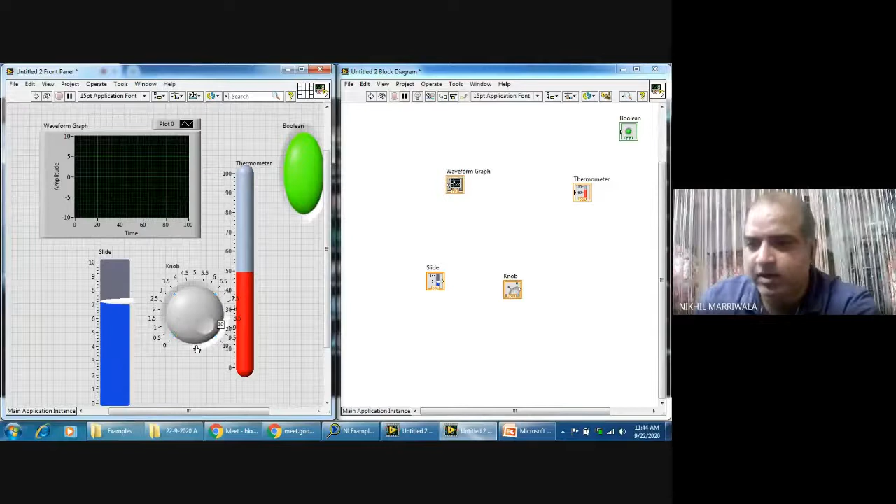So you can place numerous things. Again, I need not specify another. I can specify a knob over here. If I extend it, you can move it like you move a knob in your hardware structures. So you can move them, just holding it and moving it. These are some of the graphical things that are placed or used in LabVIEW, and this is how the front panel would behave.

So this is how I just showed you. The block diagram, or backend programming, would look like this. The front panel objects would appear as we normally saw, that whatever we are placing in the front panel, the same is appearing in the block diagram configuration. Also, we can connect them.

Once we connect them, the icon and the connector pane comes into picture. So what we'll do is we'll start with these things. I'll show you some more aspects of LabVIEW which are very useful for us, so that you become familiar with the environment, and then we will be able to design a particular system for us.

The front panel would talk about all the controls, indicators, object styles, object types, that is Boolean, numeric, and string. So this is the front panel, how it looks like.

Now, if you see over here, I just expanded or zoomed in. We have this run, and this continuous run over here. I can use this pen to highlight things. This is basically a run icon, so if you want to run your program, you can use this. Click onto this - this is continuous run. Continuous run is utilized. This is for stop, this is for pause. And then we have some font applications in this case, and there are some more features.

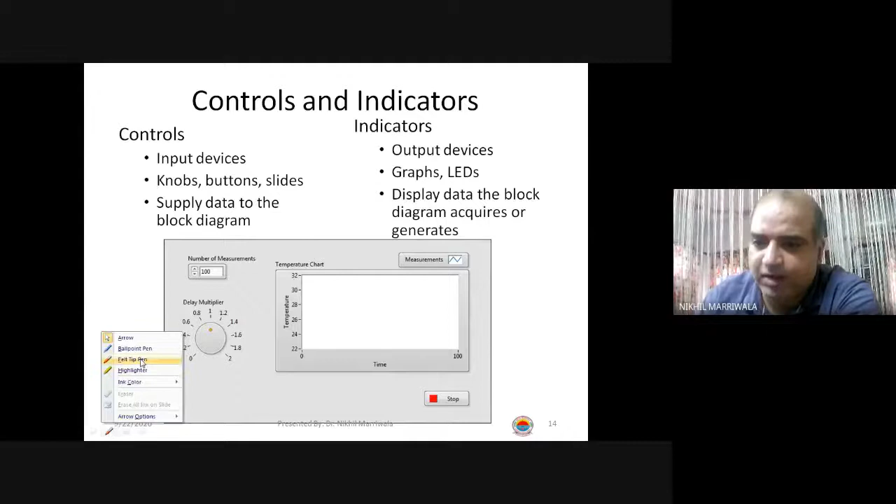So controls and indicators - I've already specified that we have different types of inputs, knobs, buttons available in the LabVIEW part, and we will be using them to actually control the operation. So front panel style objects look like this.

So we have different types of style objects. We have modern controls, we have system controls, we also have a silver control available with us. And initially when LabVIEW got started, we had some classical controls. So this is still there, right, they're still using it. The only part is the representation is a little bit different, but other than that, all the functions are the same, so we need not get confused by it.

Then we have some numeric controls and indicators I've just shown you. Control means basically the input and then the output.

So what we'll do is I'll go back to this particular software, and what I'll do is I'll show you a very simple system of how you can work with this.

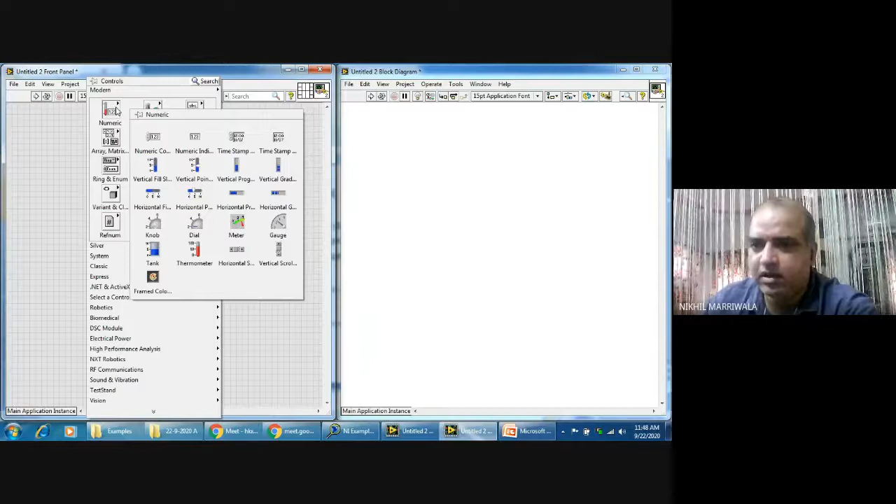So, say what we want is we want a simple structure where I use a vertical pointer and I use a thermometer for that sake. I've placed the two over here. I hope you can see this. And what I do is I change the value to 100 - I just clicked onto this and changed the value, nothing else. So now you can see the two things, slider and a thermometer.

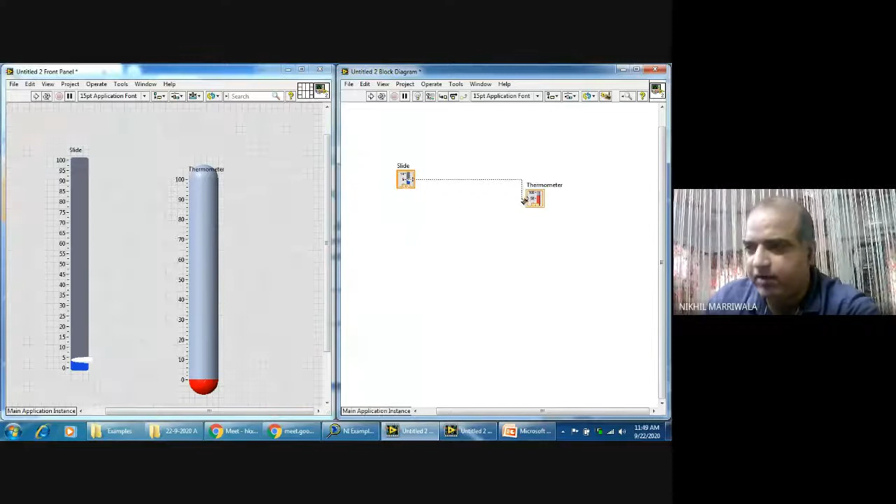A simple program to be written where I will control the output of the thermometer with the help of a slider. So I've just connected the wire. Connections will always be done in the block diagram configuration - all the connections will be there in the block diagram. So now you run this.

Now when you run this you'll see - or what I'll do is I'll run continuously - you'll see the change happening. So this is a simple program that we have written where we are controlling the thermometer with the slider. Whatever value it is showing here, the thermometer is representing the same value. I could have done it with a knob also.

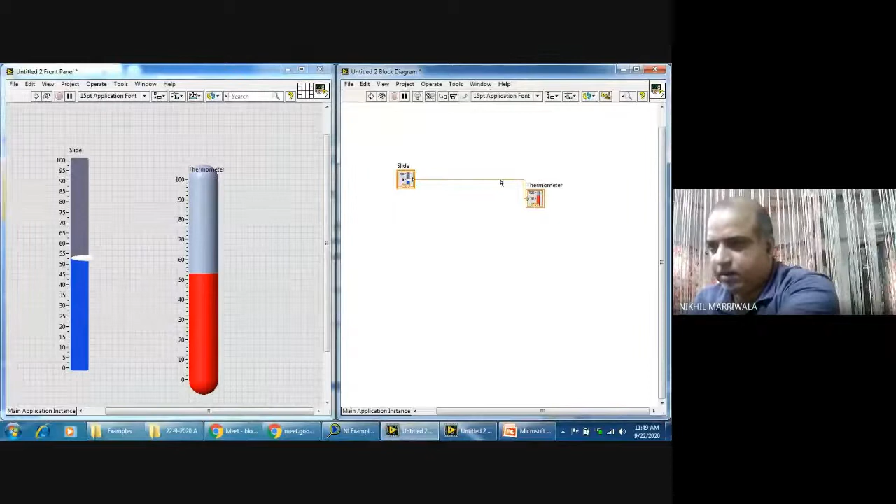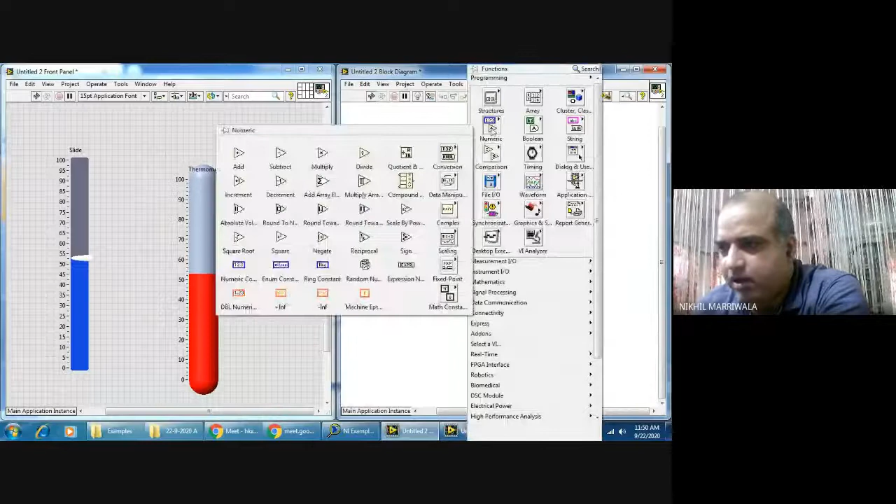Now what I'll do is similarly you can use some numeric controls also. Say, again what I'm doing is I'm right clicking - numeric control, multiply, and I use a divide. So I place three things: add, multiply, and divide. I hope everybody can see this.

Now what I'm doing is I'm just giving the input of the slider to this adder. So if you see, the output of this particular thing is - when I move my cursor here you can see x plus y. Can you see this? X plus y being represented automatically, I haven't done anything. So I've given the output to the multiplier, and this multiplier output given to the thermometer.

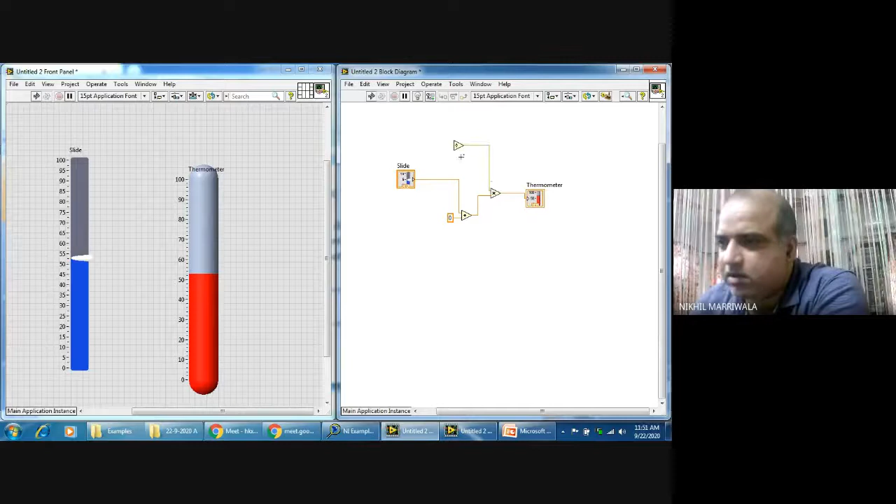Now I right click onto the other input, create a control - or say rather than control, I'll use a constant. I'll remove this so that it becomes easier for us to understand. I'll use a constant over here. The output of this divider is given to this multiplier again, and I create a constant over here. I create another constant over here, so I can give some values inside it, say 5, 9, and 32.

So what I'm doing is I've basically utilized the mathematical functions of converting from degree centigrade to Fahrenheit. Because I was using a thermometer, I just happened to use this particular example. So again, I use run continuously over here. Now you can see 0, but the output is something else because the mathematical computation is happening. I'll just move it slightly for your benefit to see where it goes. Right now it has become almost constant, and it is not increasing to that extent because it is being controlled - do you understand this? Now we have introduced a mathematical program inside the structure.

Another important thing that I told you was that we will be using this particular block called highlight execution. Have a look over this block - you'll see some data bytes moving, and you'll see some values being represented.

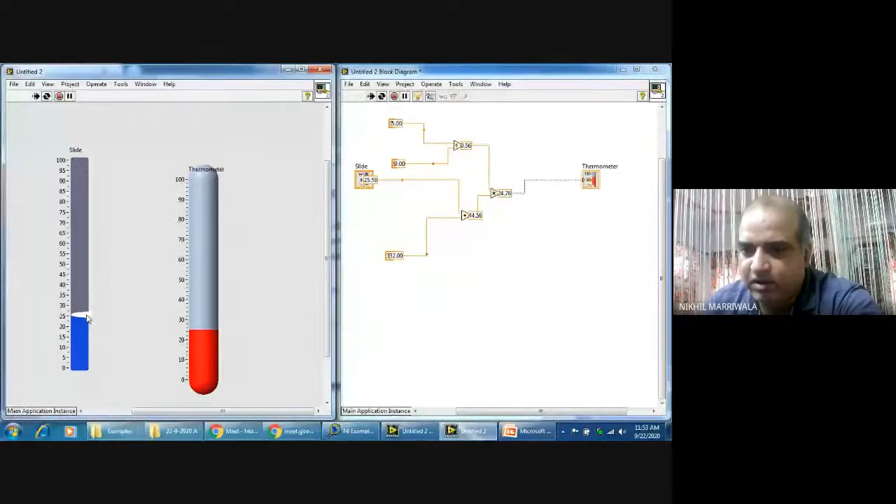You can see where the problem may be and what the output value is. Now if I change the input value, does it change? Yes, it will definitely change once the execution happens. Now it has changed, you can see that, right? I'm changing some value again because it's not that drastic, so it will take some time. It's happening slowly because data movement is being shown.

There is another important feature: we can use a probe. When I move my cursor onto this line, a P comes up. I hope everybody can see this. When I click onto this, you can see the value. I can add another value to this, node executed, then another value to this. So you can see 1, 2, 3 being represented. 1 is slider, 2 is X, 3 is Y. So everything can be monitored easily.

In all cases where you are working in laboratories, this is a very interesting and important feature, where you can record and save your data also. So whatever experiment you have done, you can visualize the experiment first, and then you can record the data also.

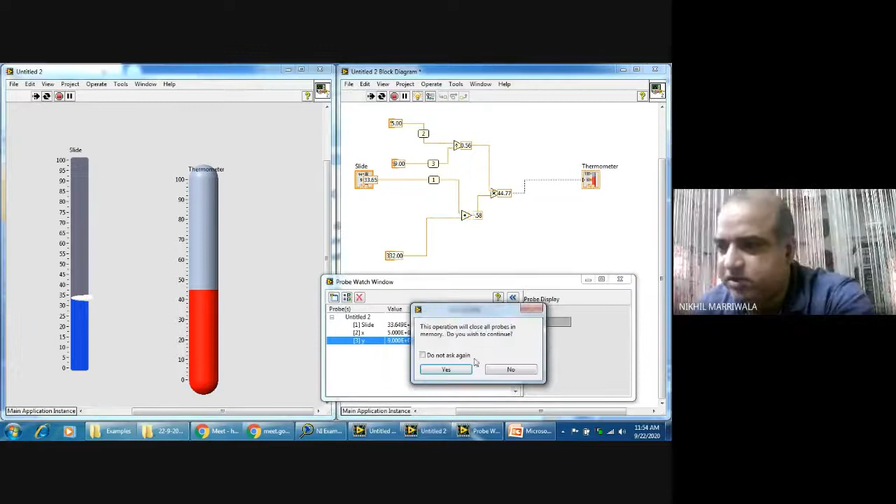So these are some of the features I wanted to show you before we start working with this particular software. So right now I'll move back to the slides.

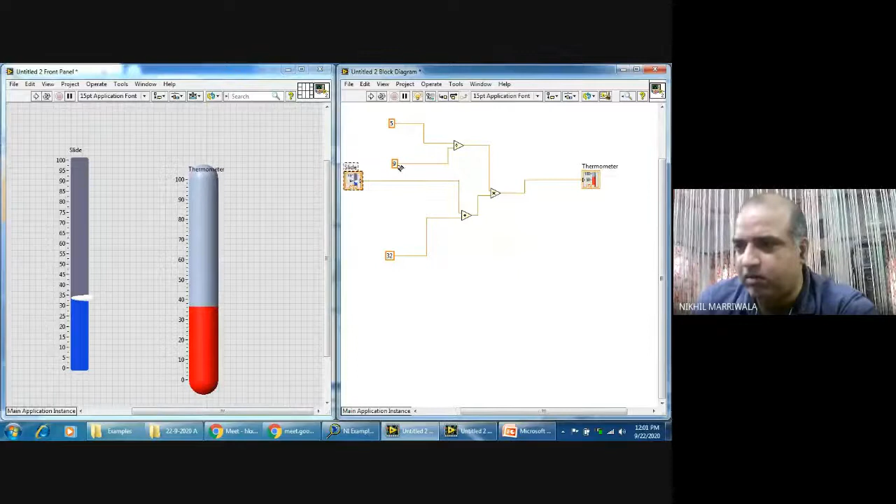I think I can remove this now, so I'll go back to the previous part. We've just programmed this. Now I'll reduce the size so I'm able to show you the next aspect of this particular structure. I'll be using the same example so you are also able to follow this. A simple program for area of a triangle can definitely be given - this might be given as a problem by sir also, so that once you are using it, you are able to utilize the features of this particular software.

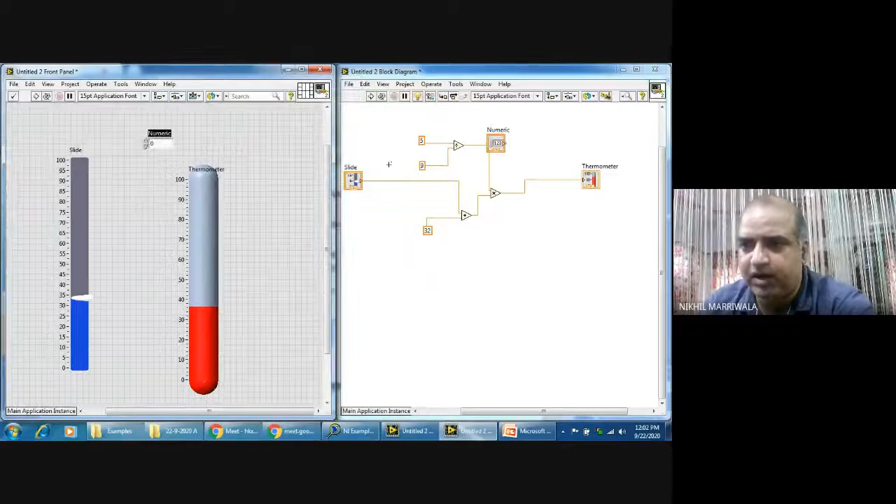Terminals for front panels - these are some of the terminals where you can click on a particular icon and it will change. How it will change, I'll tell you. Say I have placed a numeric control over here, so you can see this numeric control coming. I'll right click onto this, view as icon, and it will change to display. Very simple - view as icon looks like this, remove this and it will look like this. This is just the representation part.

Similarly, you have some terminologies being followed. This is very important, try and understand this carefully so you'll be able to use it. For numeric, there are two types: one is with orange control, another one is with blue. Boolean is natural green, and strings are pink. These are colors representing the type of data - a lot of types are being utilized.

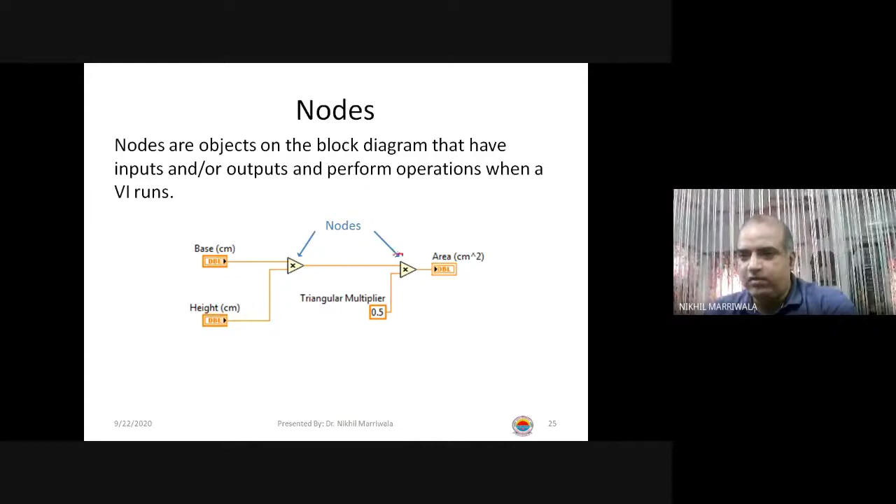So these are the nodes - wherever you use the connection, these will be referred to as nodes. Then we have the functional nodes, the sub-VI nodes, and the express VI. I'll tell you all these and show you. This is the last part I wanted to show you as far as the basic knowledge of LabVIEW is concerned: a single line is scalar, and if there is a double line, it is a 1D array.

If there are two lines with this type of structure with a gap, like a 2D array, you can extend it similarly. For floating point it's orange, integers are blue, string is pink, and Boolean is green. They automatically come like this; you need not actually change the color of these wires. If you've connected a string, it will be pink only, by default inside the system.

So I'll show you all the things. We have already seen this. The orange color is there with us, meaning we are talking about floating point values. We can also use blue color - for which part? Integer value. String, I just showed you, is with pink color by default. Similarly, we have the Boolean function.

The next important aspect in LabVIEW is the LabVIEW help. Where is it and how do you use it? Here, under Help, show the context help. Context help will tell you where this block is and what this block is - just move the cursor and it will tell you. If you want detailed help, click on detailed help and a new window will open, taking you to that particular point, say a multiplier, and telling you the details of what that aspect does. This detailed help is available for every aspect installed in this software, whatever you want to use - so it's very comprehensive help, that's what I was trying to tell you.

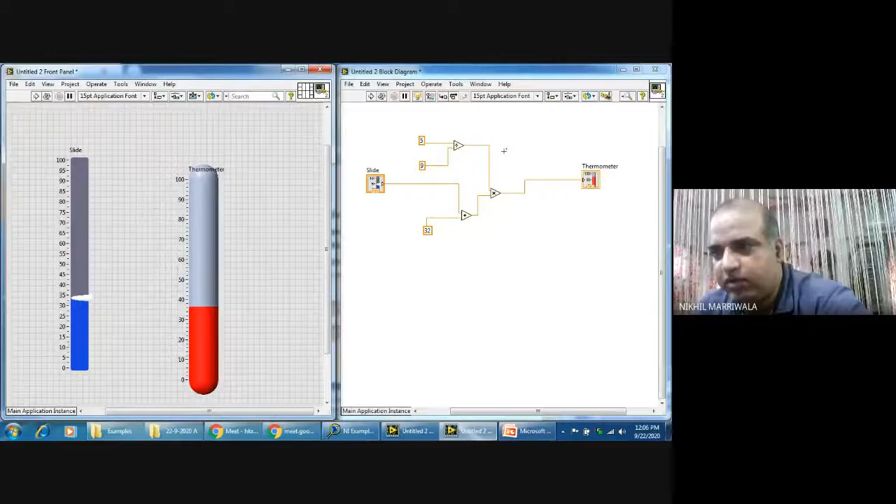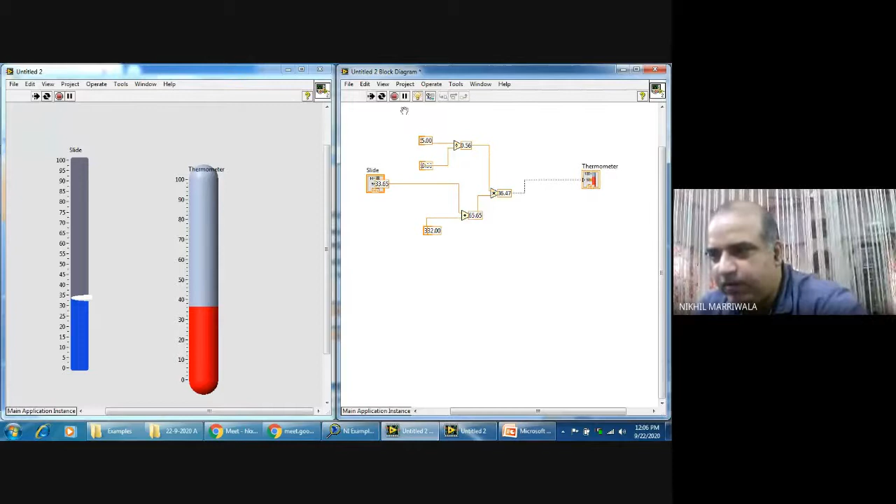So I'll stop over here and complete this structure with you. We are running this and we want to see the flow of data - can you see the flow of data? I have a quiz after this, you need to answer the things. We have a divide, an adder and a multiplier working together. I'll ask a few questions and then we'll move ahead in the programming.

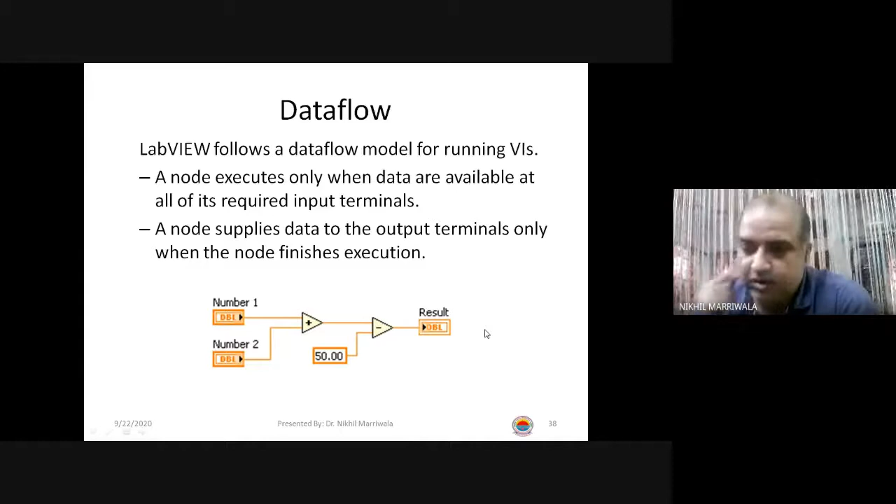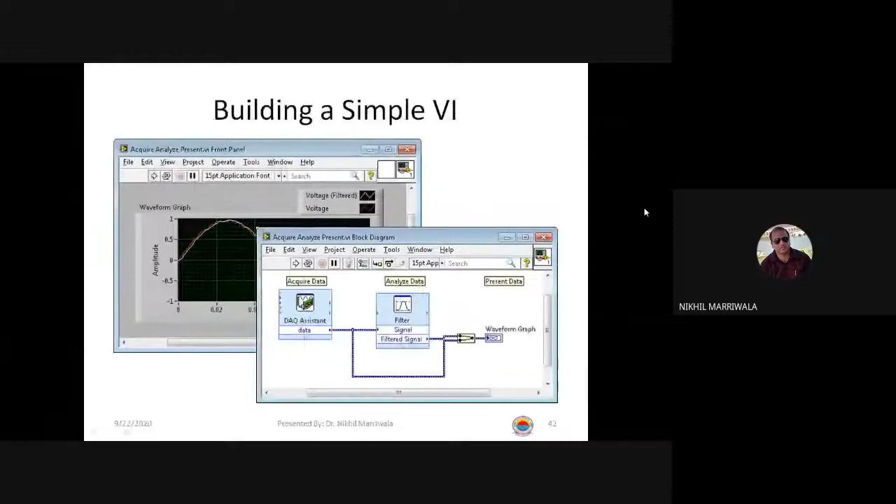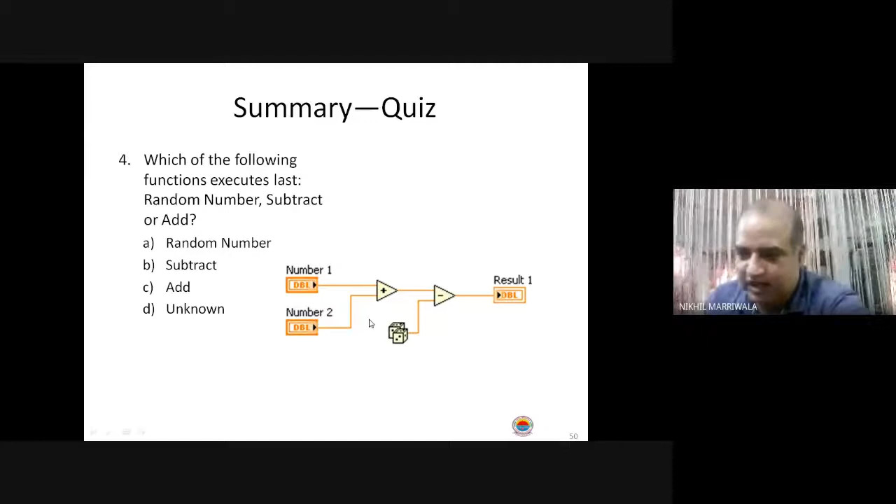So there are three nodes here. Which executes last? Random number, subtract, or add? Last is subtract. Everybody is saying subtract, right? Great, so this is the correct answer, and this sums up that you have tried to follow what I'm trying to say. Again, since there is no single answer here, I could write possibly divide, possibly random number, possibly add. But in all the other cases, we normally had the correct answer in front of us.

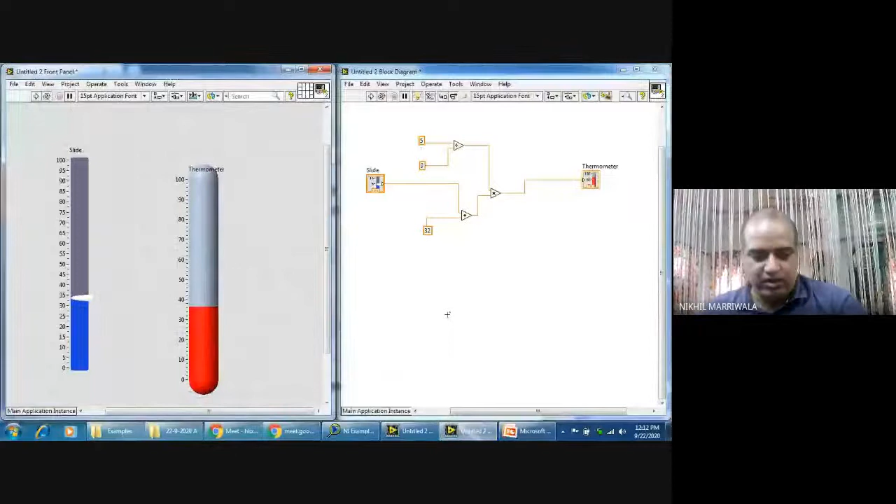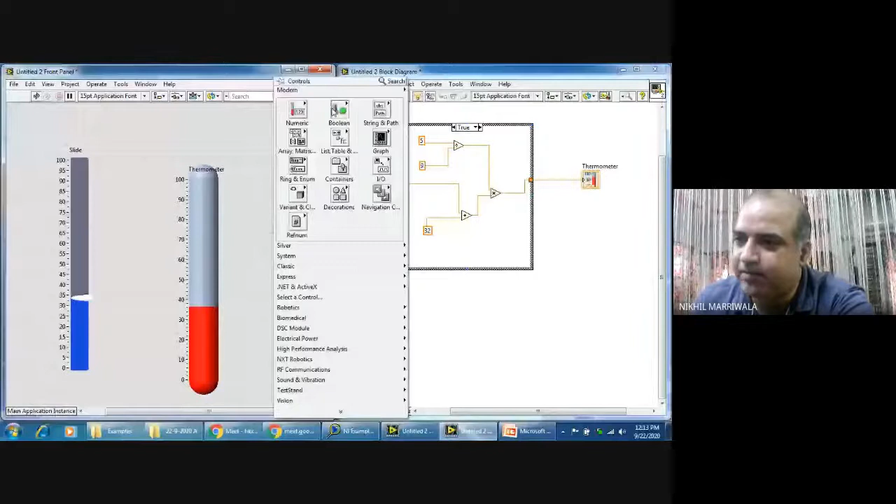So I've taken this example for you, and what I'll do is make this into a complex example right in front of you. I hope you can see the screen now, the structure. So what I'm doing is using a case structure. Have a look—just using a case structure. The case structure is of two types: true and false. If it is false, just connect this, and if the condition is true, follow this. I've used this condition, true and false. Now I can also use a Boolean toggle switch here to ensure that the structure is Boolean enabled as well.

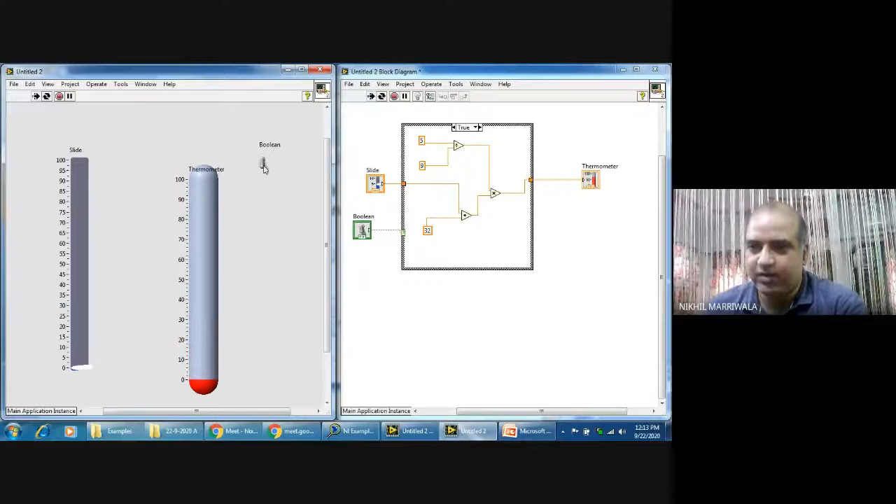Now see what happens—I'll run this. I'll just remove the highlight execution and run this structure. And you can definitely see the effect, right? Because it is off, it's 0, 0. Switch it on—starts functioning. Off, on, move it. Simple program. I haven't followed any serial code or anything of that sort. I can just use this for my on-off switch. Simple thing.

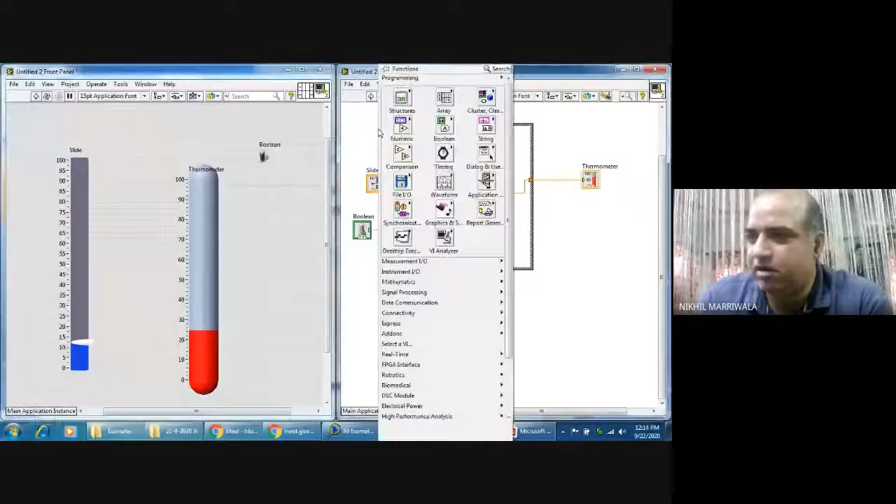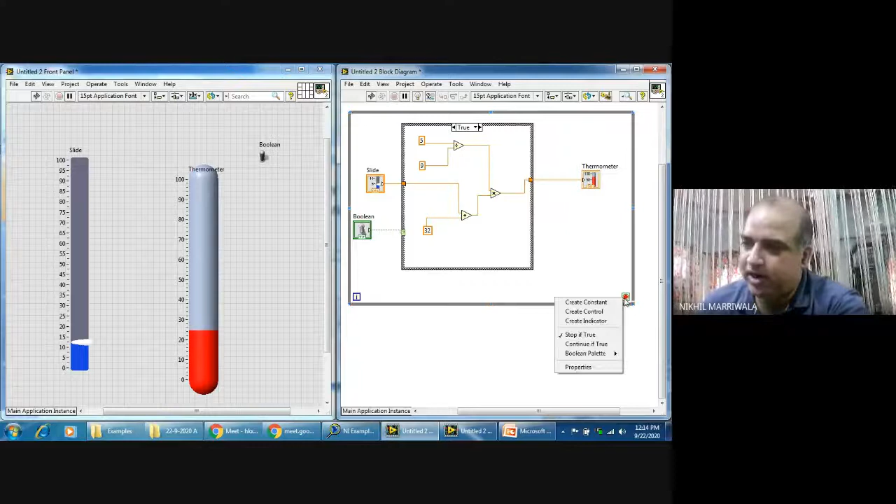Now, if instead of using run continuously I use another approach, I'll use a while loop. For those who haven't understood this, what I've done is right-click, structures, while loop, and put the entire code into a while loop. So this is how I put a while loop. And right-click onto this, create a control—so I've created a control where a stop button comes into picture. I'll use this stop button so it's visible to you all. So here comes the stop button. I started with a very simple slide and thermometer, and now I've moved to something that looks very complex, but it is not complex at all. Again, I've just used run continuously. You can see the Boolean function is working perfectly fine with me, it's providing the data, and here is the stop button.

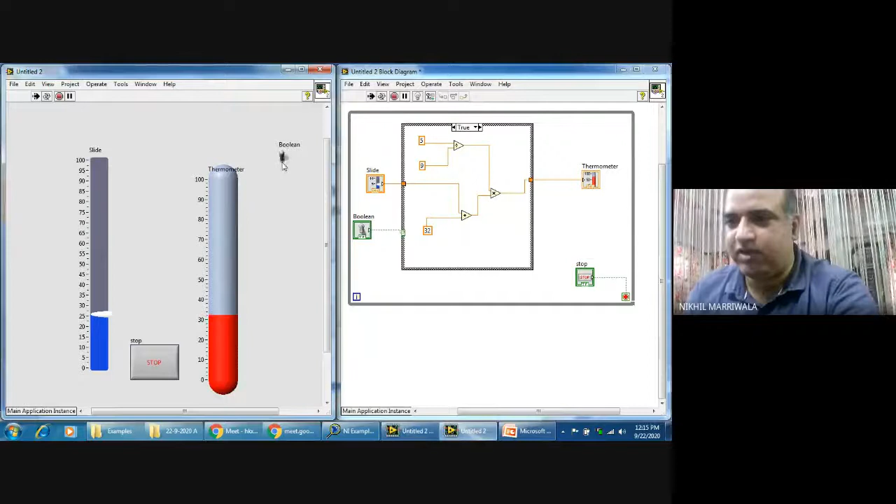So the loop is gone and the button is controlled, right? This is how easy it is to use these commands that normally are in C, where you have to follow certain rules. I'm against those rules. It should be a free programming environment where whatever you feel, you can just connect it. So I thought I would utilize a while loop. I can utilize it afterwards also, right? I need not go back inside the program to that particular place to understand what I have to do, because this is already written in C, so this is also following some structured rules, but it's providing an environment where structures can definitely be eliminated.

So now here, what you can do is you can see the flow of data also. Have a look.

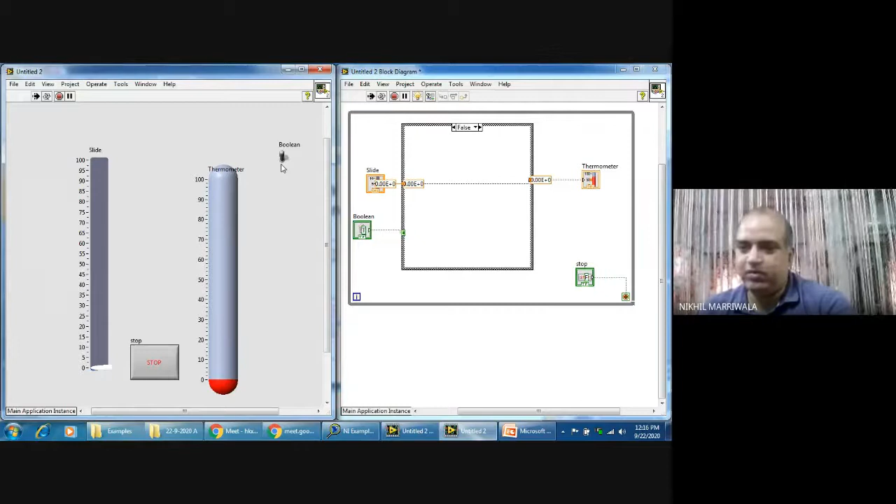So the condition in the Boolean is true. See the output. Now I change it, so it becomes false. So now you see the false. Earlier you were not able to see it, right? So when I executed the highlight execution part, you're able to see the two conditions, right? True, now false, and then the output and the true part comes, right? So now I stop it, and you're able to just click onto this button. So it has executed that loop and then came out of that, right?

So friends, I hope you are understanding and following what I'm trying to give to you.

You're still worrying about the test. I don't know, I've already taken some kind of test with you people. Don't worry, these will be simple questions. Don't worry about the test.

Hello? Are you able to understand what I'm trying to tell you over here? Yes, so I'm able to see the screen now, and yes, continuously some yeses are coming. So that's good, that's good.

See, what I want is I want everybody to understand these simple things so that you are able to use it for your own benefit. Right now, what I'll do is I can make it more complex. Do you want me to do that? Yes, I can do it for you.

I can use some numeric indicators over here. So if you see a numeric indicator I've used here, what I'll do is I'll just connect this numeric indicator here so that it shows me the output. So I can write it also, output. It will show me the output over here. I can use another numeric indicator. Okay, I'll use it from here only. Numeric indicator, which will give me the input. Just change it to icon so that the space... I'll take it out and connect it to this.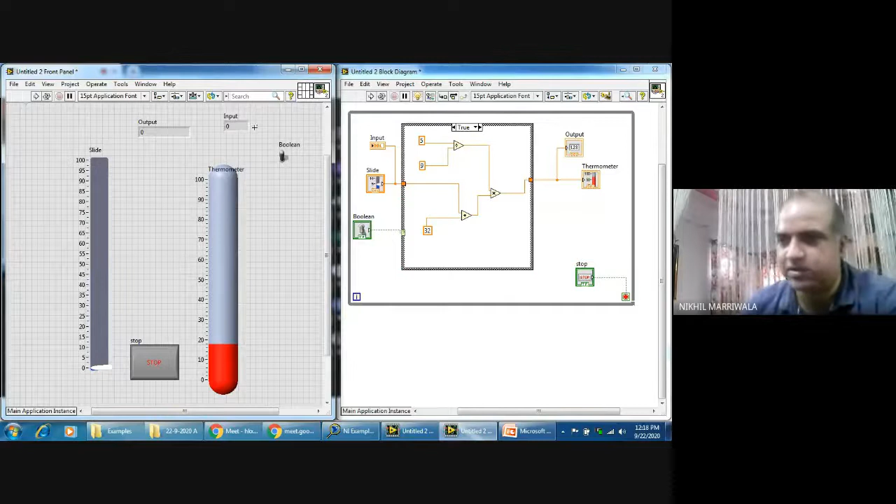So see, I'm just doing it whatever I'm liking. This is an input for me, right? If you want, you can check intermediate values also, you can use another indicator, and you can connect it over here. Right, another numeric indicator, you can connect it with this, right?

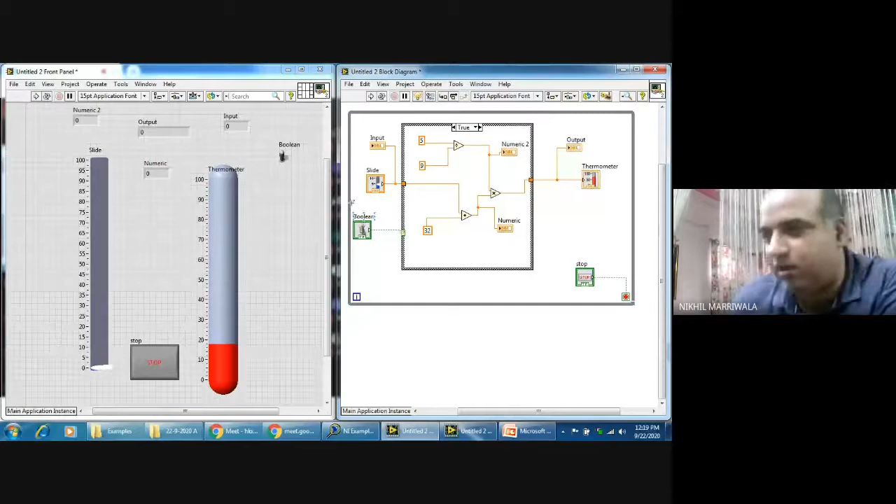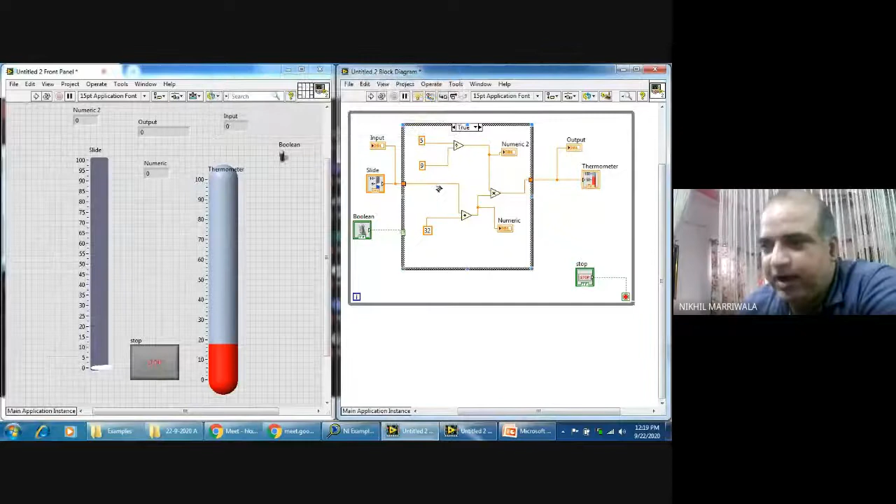So if you see, I'll just remove this. I remove icon, remove view as icon. View as icon, I've just removed it. So you see, it will look like this is a very complex circuit. I don't know how you have just designed it, but normally, as I have explained to you, as things just keep on coming to your mind, you can definitely do it accordingly to what you want, right?

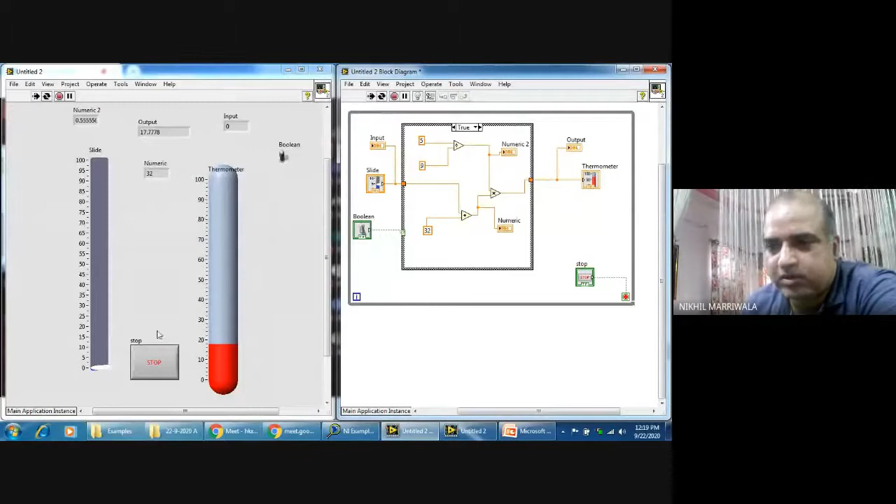So just have a look, we'll run it, and now you can see. You can see the values, and you can see the change in the values also. Can you see this happening? So all the values are changing. So output, input, numeric values, they are all changing for me to actually help me out around this.

I hope things are pretty much clear as far as the basic designing and basic usage of this particular software is concerned, because if this is clear, then I can move to the next level. So I have already given you the new way of thinking, where you can build applications accordingly, right?

So the applications in this particular language are called virtual instruments. I've already highlighted this part to you people, VIs, which are made up of two parts: the front panel and the source diagram, or block diagram as we call it. Always start with the front panel. You need to place these, these are some rules, right? But you can also omit them. There is no basic phenomena that you always have to start with the front panel, but still it is good that you start with the front panel. You can draw a pencil block diagram to understand whatever blocks you want. Basically, this is a G code, so we have already made a G code, and you are all done with it. Just make a block diagram and you're done with it, right?

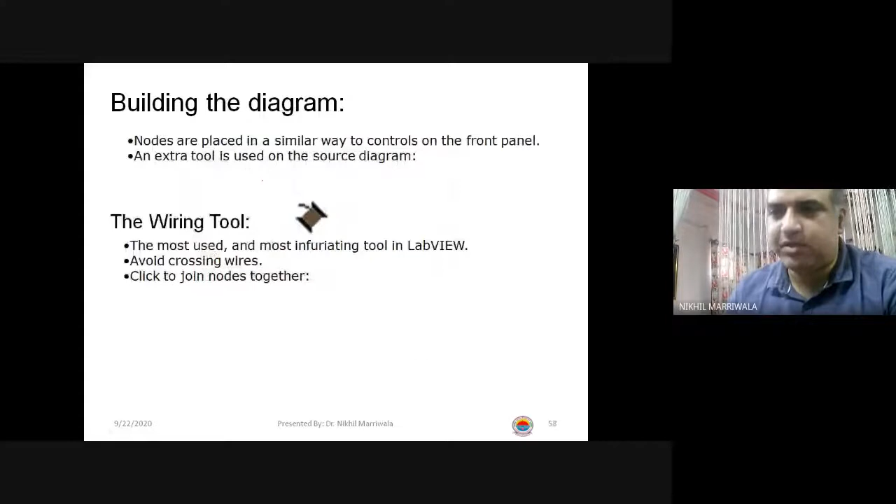So simple things, we have some wiring tools available. I'm using it with you. So building this particular structure using different nodes, these structures we have already used. While loop, there is for loop available, right? There are case structures available, sequence, formula node, and we have just utilized them. These are all similar to the statements you have seen in C and other languages, so they are very easy to use. You have already seen the while loop, right?

Before I go to the theoretical aspects, I'm just giving these to you so you're able to understand what I'm trying to say. You can use shift registers in this. We just connected one shift register of a Boolean function, if you remember. Just quickly going through these things because we don't have that much time available with us. So there is a for loop, there is a sequence available with us, and we also have a formula node, a very, very interesting thing, right? We do have a formula node available with us.

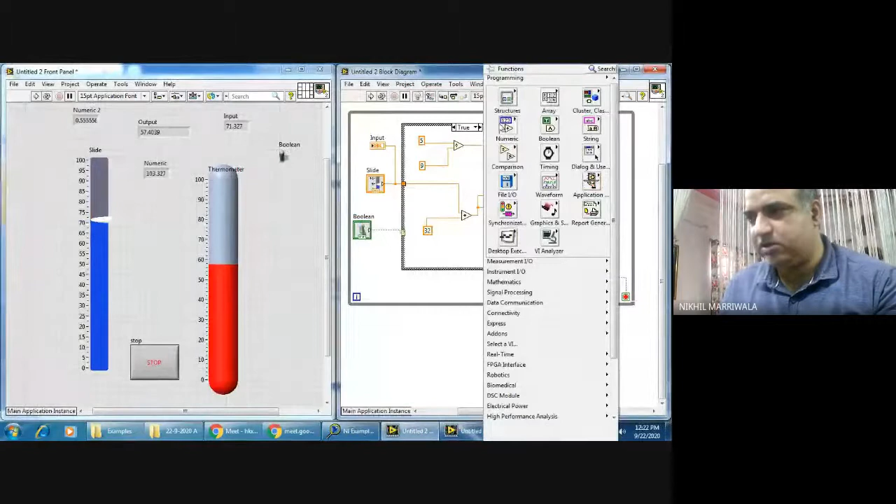Structures, and here is the formula node. You can write your own formula inside it, like the way you program something in MATLAB. You can write that program or a formula over here, and the same gets executed. Put it inside the circuit, the same would get executed, right? It has taken it, and it has already embedded this inside it. So we have a formula node available with us, and this can definitely be utilized. You can write this kind of formula, A and B are the two terminals. Normally, whatever terminals you like come over. So you need to avoid large numbers of arithmetic functions in this case, and if it has more than more inputs and outputs, use this C syntax, right?

So we also have an event structure. We are not talking about this right now. The next part is moving to the next level.

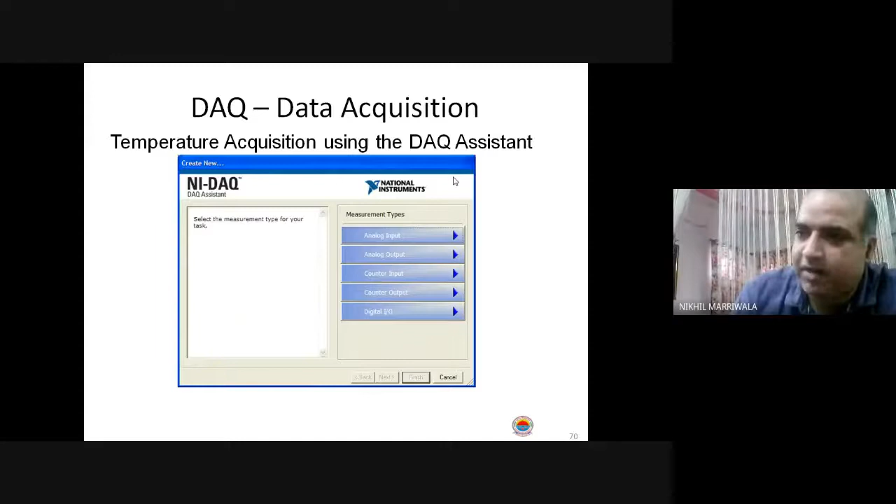So because we have understood how to design simple systems with LabVIEW, now the next part is how to use data acquisition systems with LabVIEW. There can be different acquisitions done through this particular software directly. So there are terminal blocks, there are DAQ cards, and there are sensors available with this software. You can utilize these sensors, take real-time information, process it to the DAQ cards, give it directly to LabVIEW, and LabVIEW will process it accordingly. So there are certain things that need to be understood for DAQ acquisition. I'm just running through this presentation because I don't have any DAQ card available to show you exactly what needs to be done, but these are some of the DAQ cards that are available.

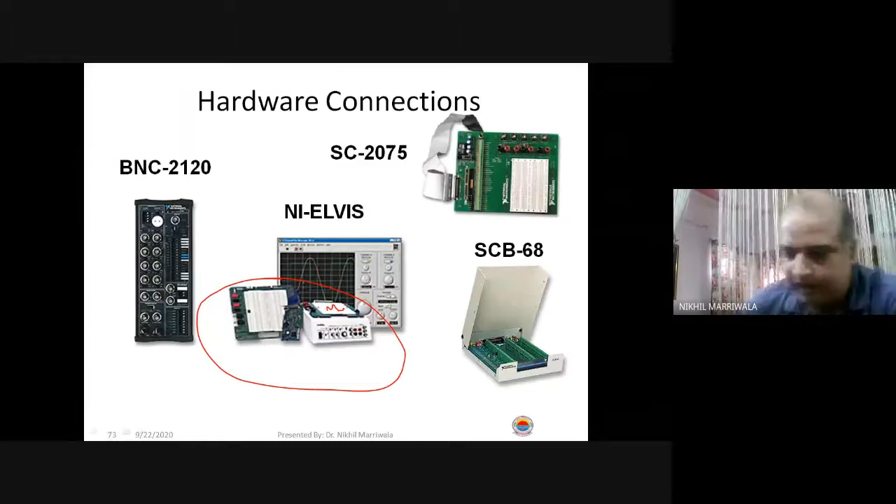NI Elvis kit is a very interesting and important kit being utilized by many laboratories. All the features of the physical breadboard are present on this kit. You can make your own circuit on this kit, connect it directly with the computer, and analyze all kinds of inputs and outputs, whatever you want to see. So this is an easier structure. We have some BNC connectors, SC2075, etc. There are many more, right? So I haven't specified all of them.

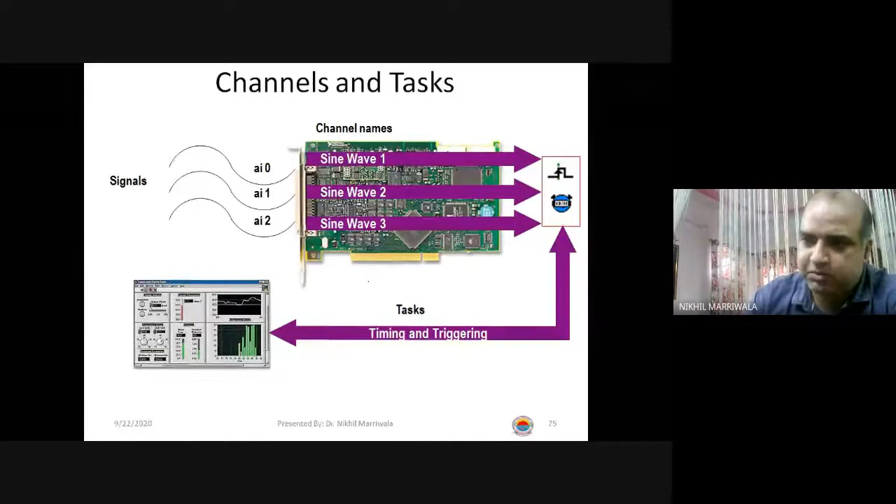Channels and tasks, so DAQ measurement is done through a DAQ assistant. Because I don't have any card, but I can still show you how the DAQ assistant is used. So we have some instrument, as you can see over here. We have some DAQ card connected with it, and you directly connect it with the computer over here. So the outputs can be represented directly onto the screen. This is how it can be used.

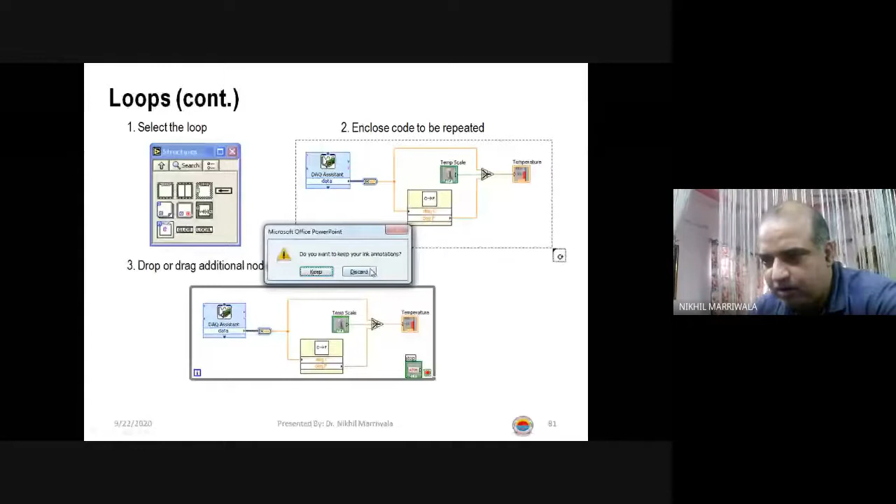Loops and while loops we have already utilized, so what I'll do is move to the next level to ensure we have followed this. Now have a look, I'll tell you a very simple structure over here. I just forgot to tell you regarding this. Now this circuit basically looks very complex, so what I've done is, have a look.

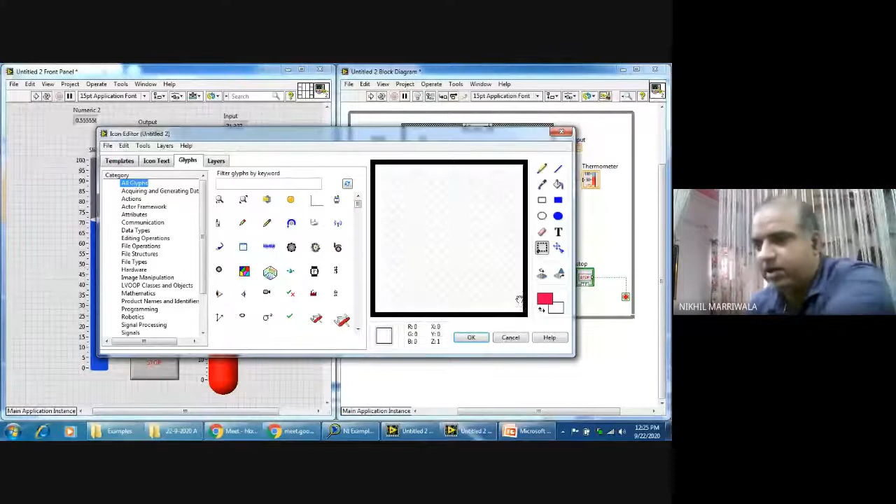I've double clicked onto this icon, right? This icon appears in front of me. I'm just selecting it and deleting this. And what I'll do is place a thermometer, temperature, right? I'm placing it over here, degree centigrade, just to indicate what I'm doing. Right, so the icon has changed.

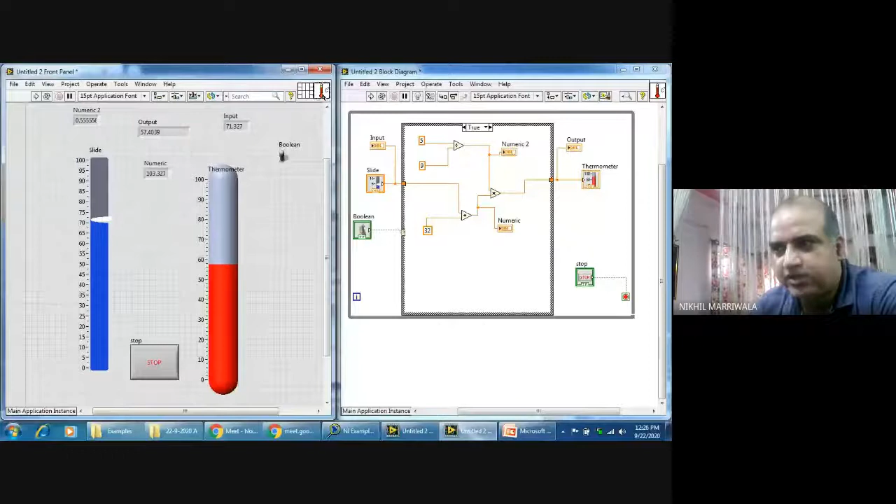Also, I can do one thing, I can click onto this, create a sub VI. This has changed, everything has gone and changed to sub VI. Again, clicking onto this icon, removing this, again I can write temperature. This is what I want, temperature, degree centigrade over here, placing it over here.

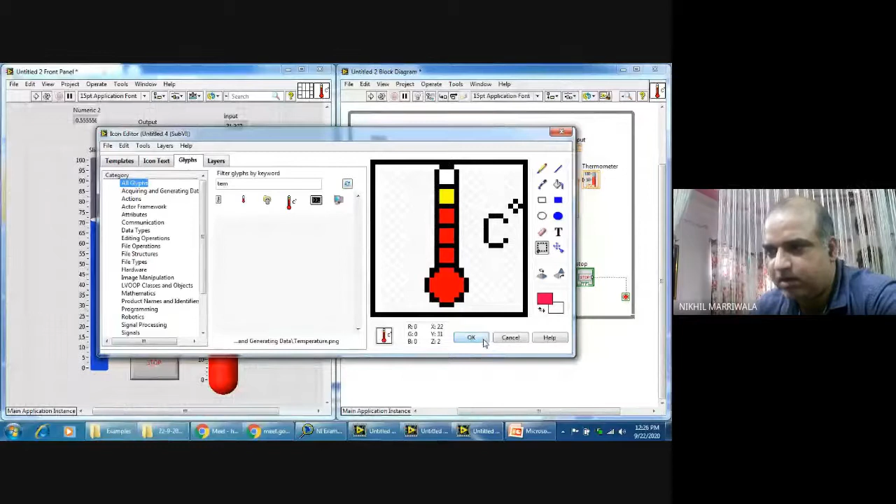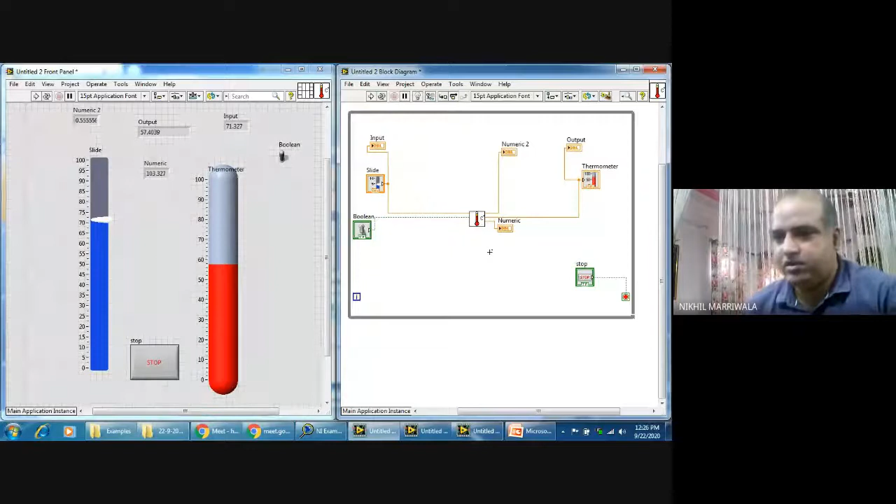And you see the icon change, right? So this is a simple thing. So now it will not look more complex to you. Have we tried to follow this?

Usha ji, there is no open source. Okay, I'll explain the use of while loop also. Is it a proprietary software? Yes, it is a proprietary software, and there is no open source software available as far as LabVIEW is concerned right now. You can take it up as a project, right? Because this is also some PhD project work done by one of the developers of LabVIEW. He developed this software as his PhD study, right? So you can definitely take that up. But right now, there is no open source code available as far as this structure is concerned, right? So, any other questions? No, nothing much. Yeah, right, Ushaji. Thank you very much. I hope I've answered that.

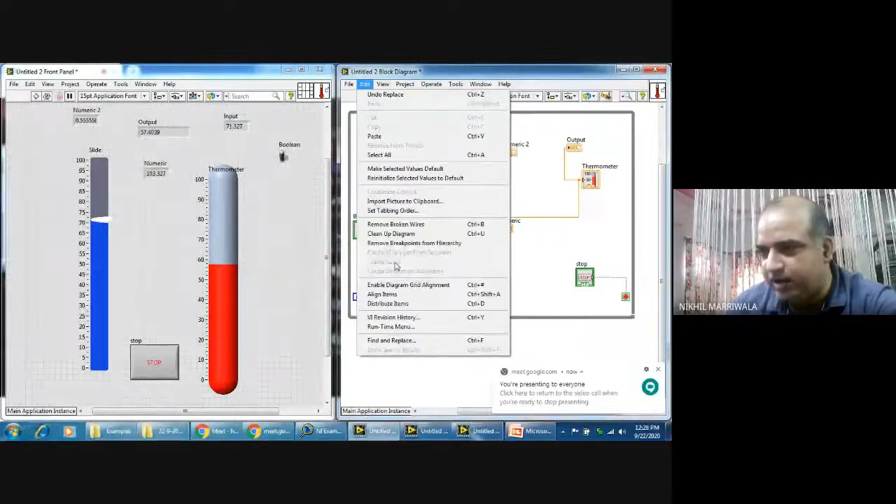So yes, what I did was I just changed this icon. Again, I'll tell you: edit, create sub VI, because you need to connect to that, and the sub VI will be connected. So a sub VI is this one. Now if you see inside it, it is like this. Now it is showing me in another window. So this is the beauty of the thing, right? I just capitalized on the features of this particular structure and used it effectively.

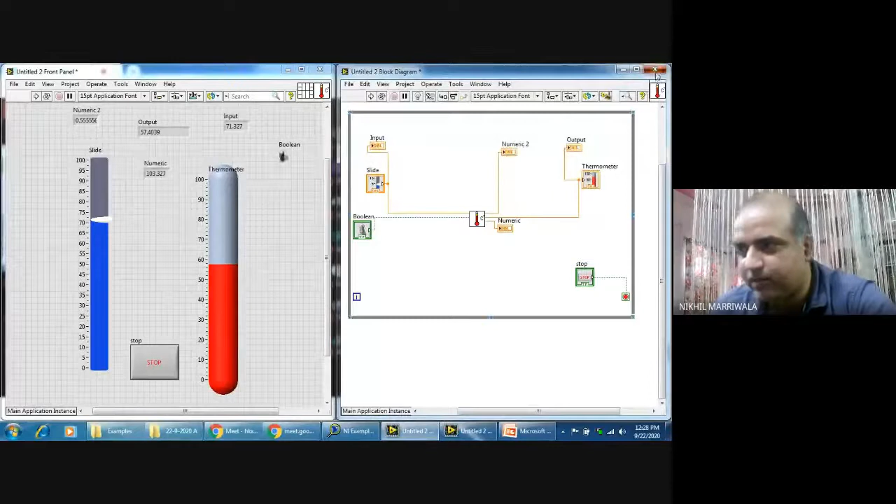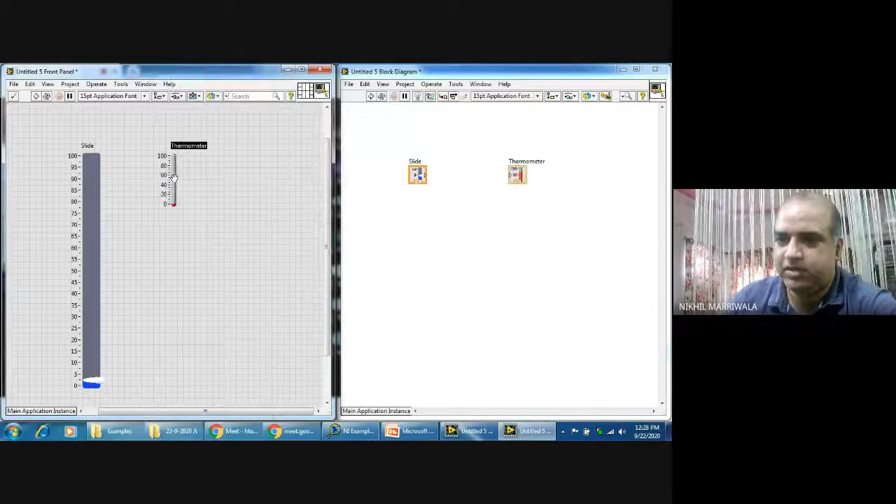So somebody was asking me to show the while loop. So what I'll do is, for the benefit of everybody, I'll quickly revise what we have done, right, so that you all understand what we were up to. I'm using this pointer again, just extending it. I'm using a thermometer for myself, just to revise the things so that it is easier for you to remember, right? Now a thermometer and a slider, and I'll use some numeric controls.

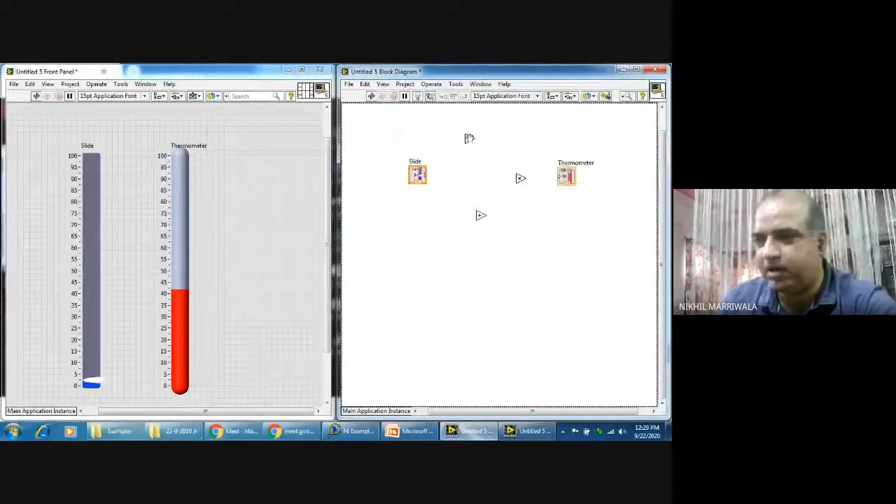I'll use an adder, a multiplier for me to actually produce the multiplied output, and a divider circuit. So the slider input, one of the inputs going to the adder, creating some constant. The output, one of the outputs, is given to the multiplier, and the divider output is given here. I connect this to the thermometer so that whatever inputs I'm giving are actually taken up by the thermometer effectively, right? So I'm creating some constants here. Now whatever values you want to give, you can give according to the formula. I'm using the same formula we used earlier so that this can be utilized easily.

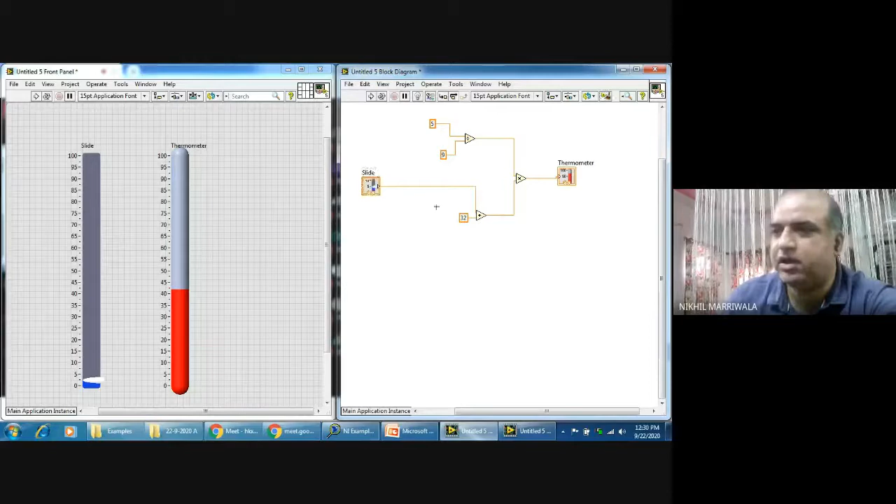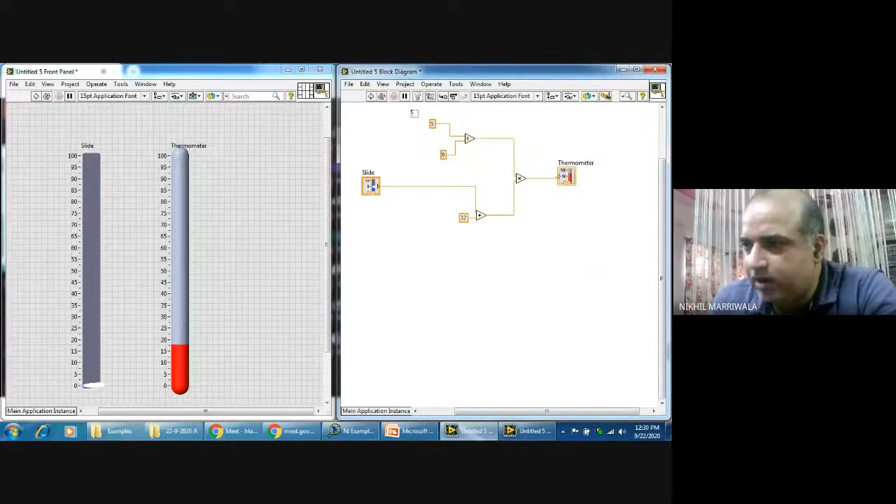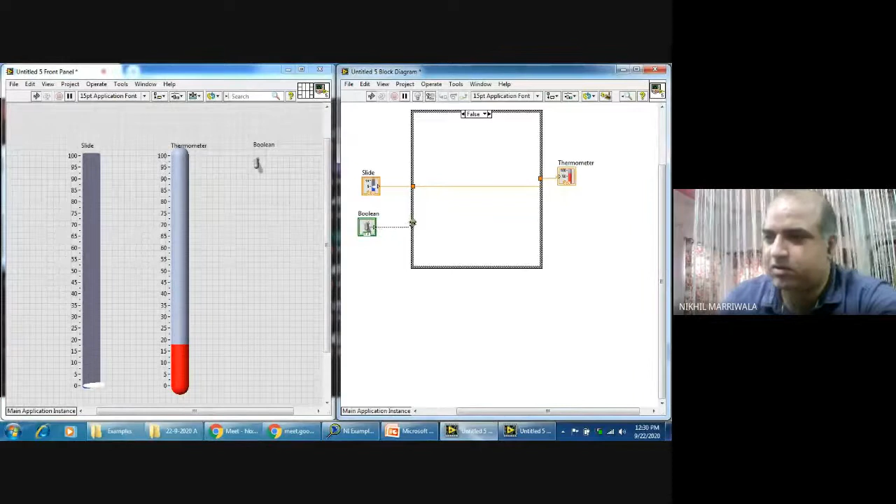So see, now this will function perfectly as we wanted, right? Because this is running - not running continuously right now. So yes, now let's see, right? It has started functioning. So somebody was asking me for a while loop - yes, I can definitely give you a while loop after this. So what I've done is I've used the case structure, a true and a false, and for the false part, I connect it directly, right? And for that Boolean function, I'll use a vertical toggle switch so that the Boolean function is also utilized, right? So this is the simple structure that we have built.

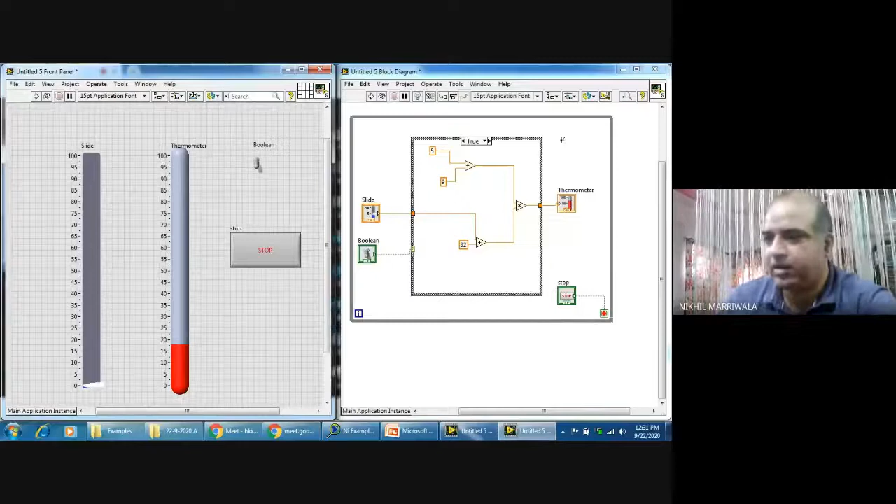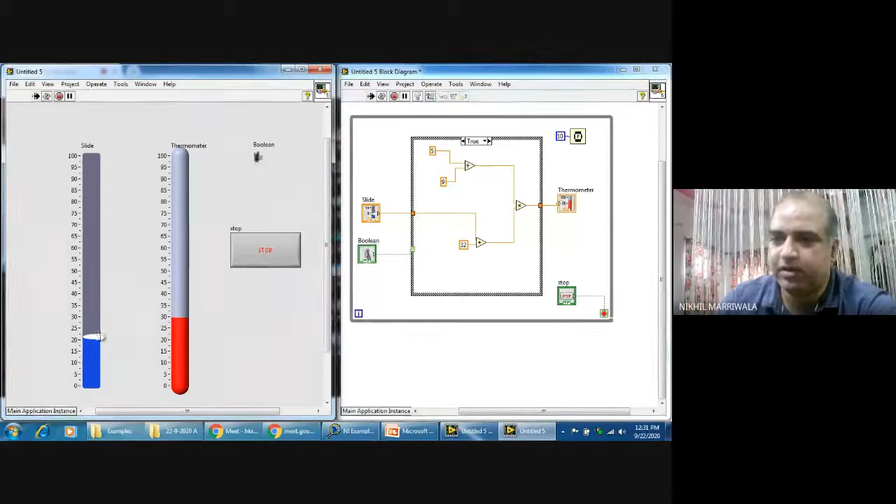Now, if I want this to run continuously, a while loop is created for this entire thing, right? And I create a control - control means a stop button comes automatically for me; this is the stop button. I can even use some timing here - implement some timing, create a constant and write a value. Say I can write a value of 10, so it will be a little slower for me. Right? Can you see this? So I hope the question that was asked for the while loop has been answered now.

GUIs can be done in MATLAB or Scilab. Yes, you're right. Again, these are not free softwares. MATLAB is not actually a free software; you have to install it, and Simulink is the one where you can use the GUIs. But again, I repeat, the libraries utilized by the GUI in MATLAB are not that effective, as you can see, because in MATLAB you have to follow some rules to write the codes. That is the important part I'm trying to tell you. Here there are no rules - whatever comes to your mind, you can just do it, right?

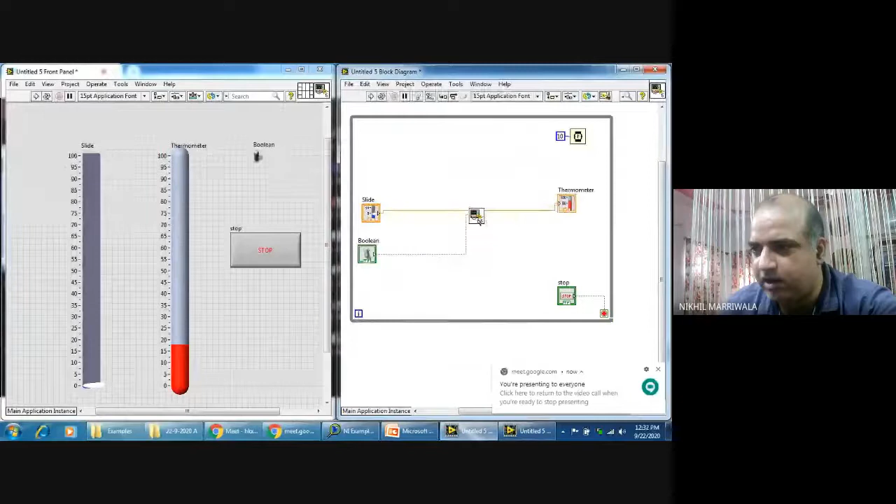So the step that was there to create a sub VI, again I'm doing it. I just click onto this particular structure, edit, create a sub VI, and the entire circuit is gone and only a sub VI is left for me, right? Now I can change this, and just see what I do.

Temperature over here, place it over here, and you'll see the temperature icon coming down. So it normally reflects that you are working with a temperature structure, right? Now you can run this. You can find out what is happening and you can stop it very clearly.

Yes, somebody, I think, please provide the link. Which link? I don't know. How to decide which hardware to buy for DAQ?

It's very difficult for us beginners to understand which DAQ card to utilize, so that is why I gave you an example. The example is for NI Elvis, right? If you're working with digital electronics or designing any circuit, you can buy that particular kit called NI Elvis and work with it. Other than that, you can put a query of your problem to ni.com, and they will definitely reply back with the available DAQ cards for your solution.

Say if somebody is working with a communication toolbox and wants to work with a communication kit, they have a myRIO or a USRP available, you can work with that. I'm myself working with that, so that is why I can highlight it. But you cannot work with all the toolboxes.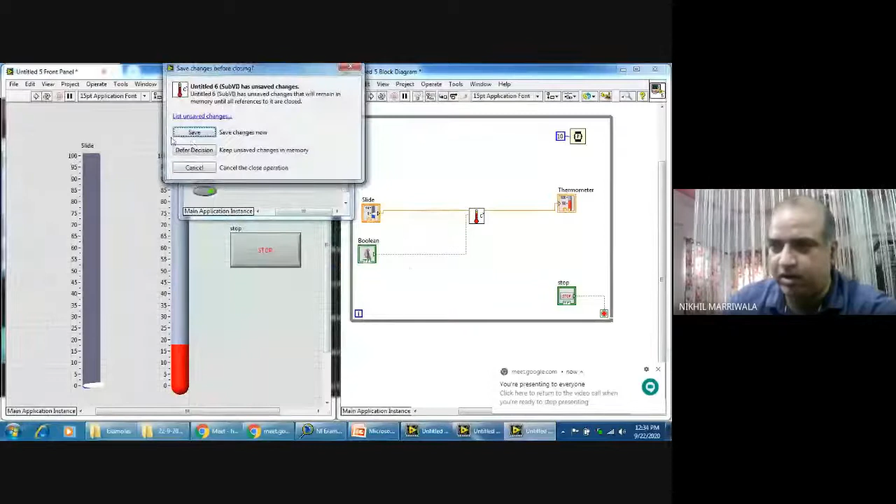Now what I'll do is take another leap and talk about the next part where you utilize the available toolkits present in LabVIEW. We'll quickly go through this.

We have an Express VI over here. Kindly have a look, Express VI, we have input. I use a simulate signal over here. This simulate signal, once placed, will give me some kinds of output: sine, square, triangular, sawtooth, etc. Now what I want is to display this output, so I put a waveform graph. I extend it so you are able to see it. This output is directly connected with it, and once I run it, you'll see the sine wave.

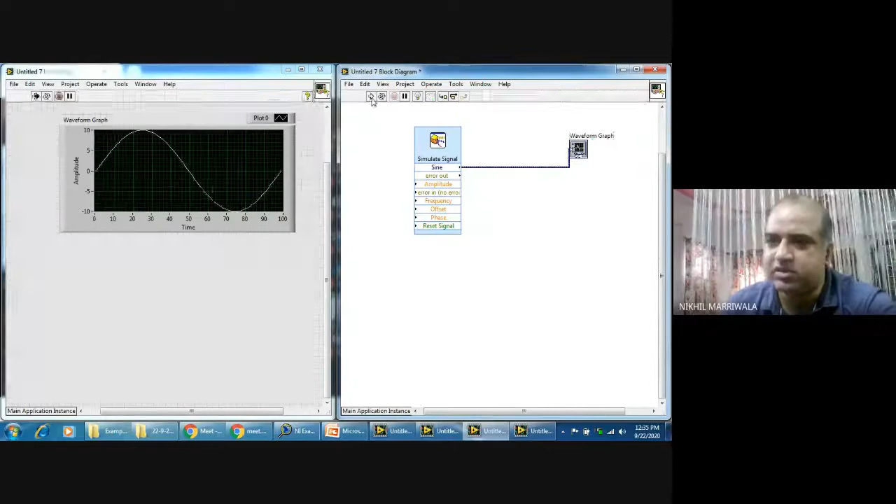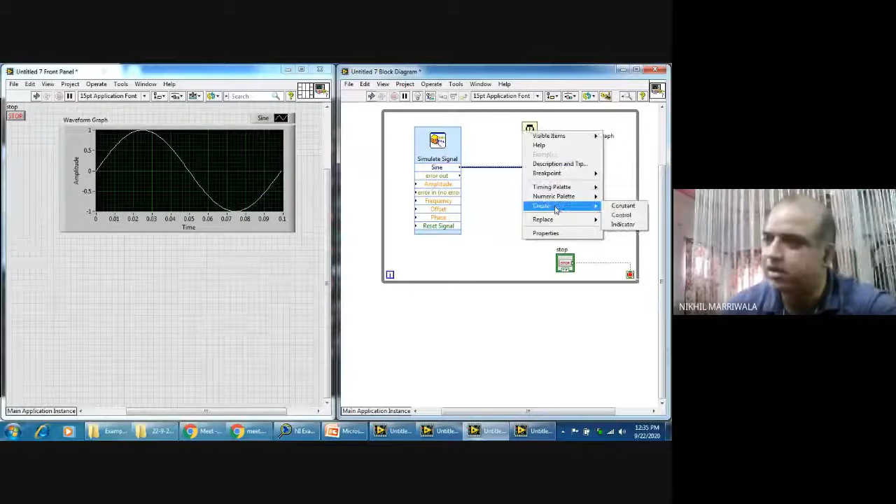Very simple. Now somebody was asking for a while loop, which is very importantly used in this. I'll use a while loop, and I'll use a control to stop this. Also, I'll use some timing so that I'm able to control this curve which is coming and utilize the things.

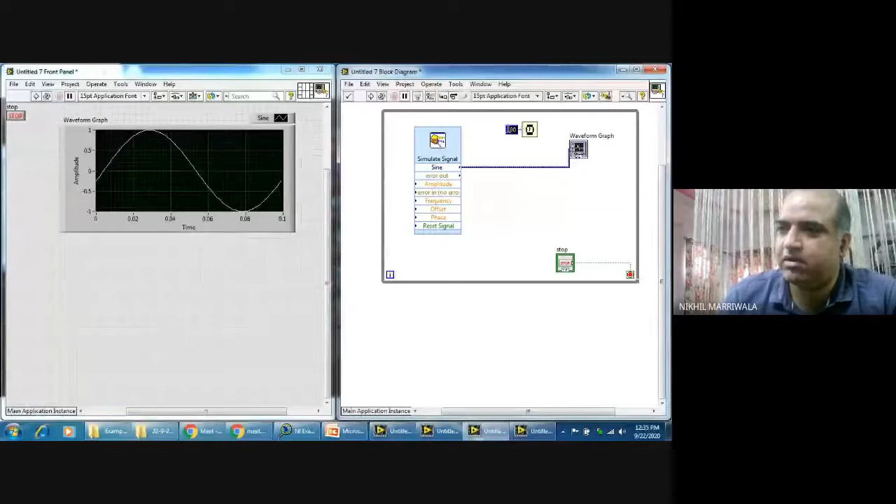Now run this. You see the waveform moving, right? Earlier it was stable, now it is moving. I can increase the speed, just reduce the time. I reduce this time to 50. Have we increased the speed? Yes, we definitely increased the speed. So the moving waveform is here.

Now I can create a control, or rather than this particular thing, what I'll do is I use a knob. This knob is connected to the amplitude. I use another knob which is connected to the frequency. If you want, you can connect all the other things also. I can connect this to offset or phase, whatever you want.

So I'm giving them as input, and I change the values, say all the values to 100, and just click away. If I had to do this in any other language, it would have been very difficult, right? Because this is graphically controlled, so you can see it is an easier option for me.

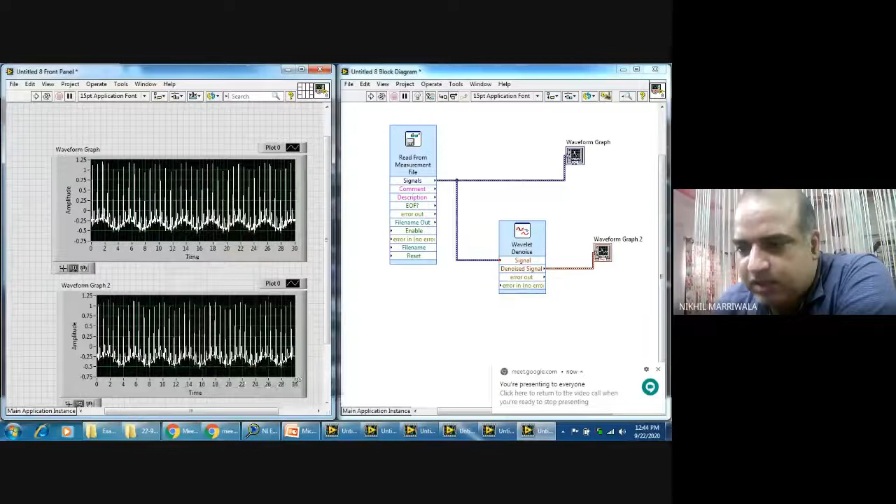So you right click onto this waveform graph, export this data to Excel. And you'll see an Excel file appearing. Can you see this data over here? Now you can just select it.

And what you can do is plot your graph over here. You can see this graph, right? So whatever you want to do, it's very easy for us to understand what we are trying to do. Export the data to Excel, very easy. You can export it to clipboard also, to a simplified image also.

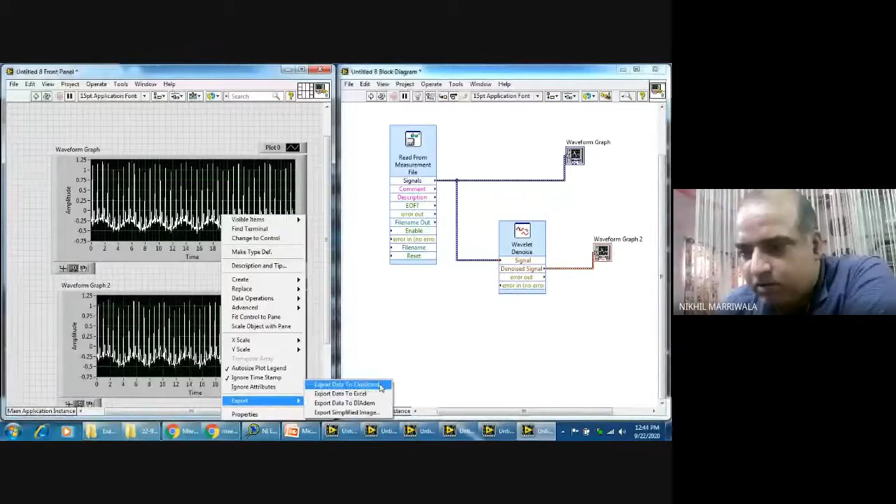There are so many options available as far as this structure is concerned. I don't know what happened, it just went away. So this is an easier part.

There are many more examples that I can talk with you people. There are many more things I can discuss, but right now I don't think there is much time available with us. So what I'll do is I'll just stop over here. I'll still show you certain things.

When I right click onto this, these are the toolkits: measurement IO, instrument IO, a mathematical toolbox, complete mathematical toolbox, signal processing, advanced signal processing toolbox, whatever you want to understand, data communication, connectivity, the express VIs, the add-ons, real-time functionings, robotics, biomedical, FPGA, DSC modules, electrical power.

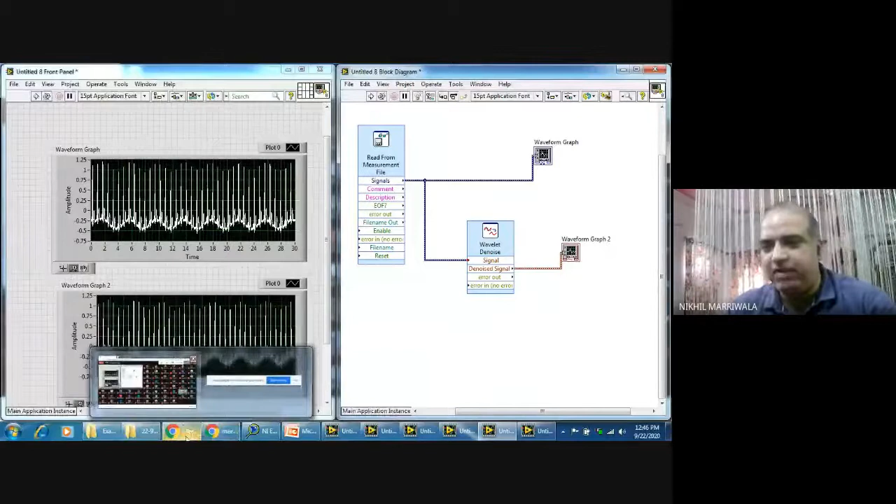If you're working with electrical engineering, a brilliant toolkit is available: NXT robotics, RF communication, sound and vibration, state chart, test stand. You name anything and you get everything over here. There are so many libraries. So you may be from any field. This particular presentation was dealt for the benefit of everybody. You might be from any of the fields. You can still use this very effectively.

I hope, sir, I was able to communicate my work to all of you. Though I haven't communicated runtime change to change the value of control, or tool using runtime change. I just read the question.

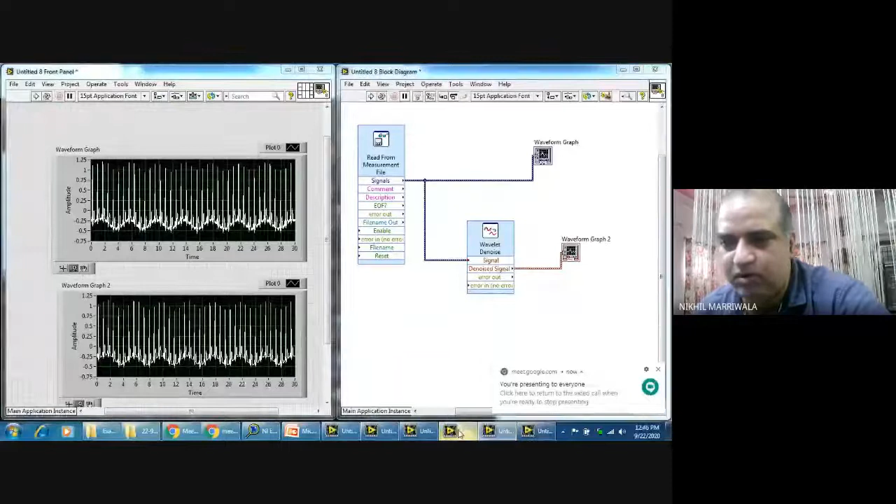Runtime to change the value of control? Oh, simple, ma'am, I just use this. There is no tool. These are the inputs, you can just use them. They are running, the program is running continuously, and you can just change them, right?

I'm running this runtime, I hope you were asking this only. Or you can use the control value also, no, not an issue. That is what I was not trying to use earlier, right? But if you want, you can use that also.

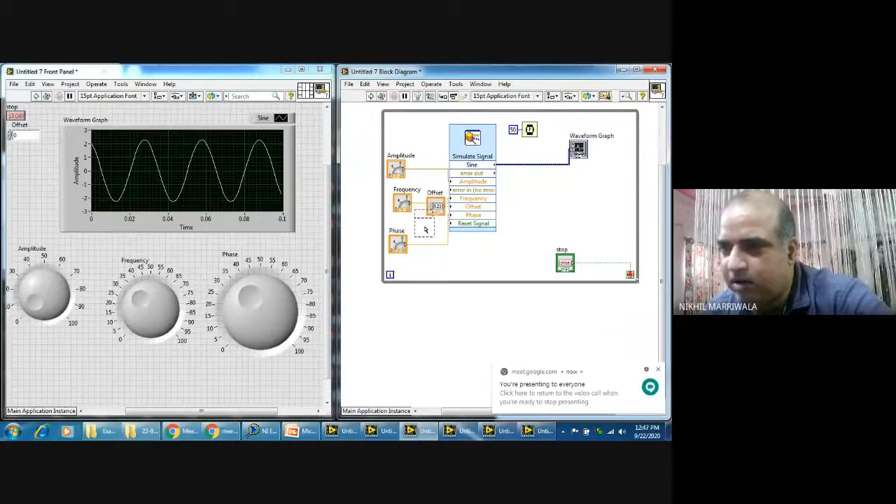Let's say for offset part, I'll show you. Create a control, right? So this is the control. Now you have to just up and down the value with this, or you can write the value inside it. So it's better that we use what type of application we are trying to work with, right?

This is the cross wire indicating that the connection was not right.

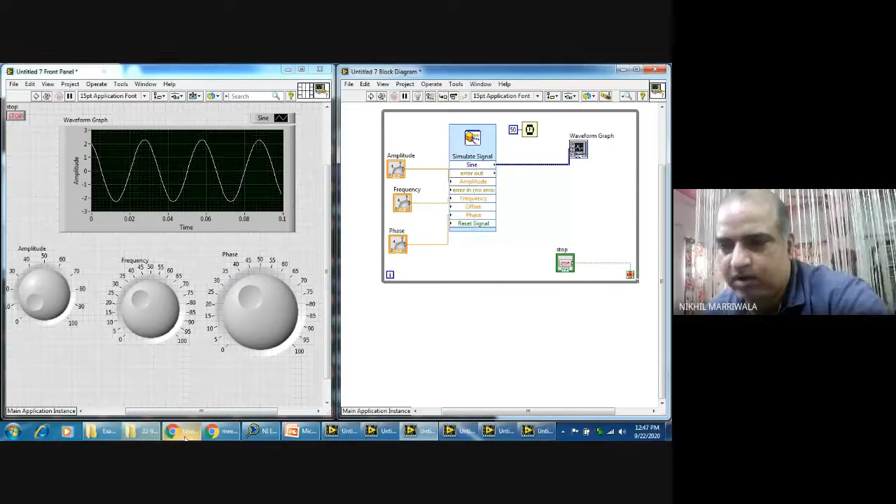Sir, how have you prepared this software? I haven't prepared this software, ma'am, this is being distributed. Bhattacharya sir, I haven't prepared this software. This is being distributed by National Instruments, and we are using it because we have procured this in the college. We are using it, right? So I'm just using it for some of the applications.

Yes, you can definitely find that out, the difference between numeric indicators and controls, right? So again, I'll tell you. A numeric control is like this, and a numeric indicator is like this, right?

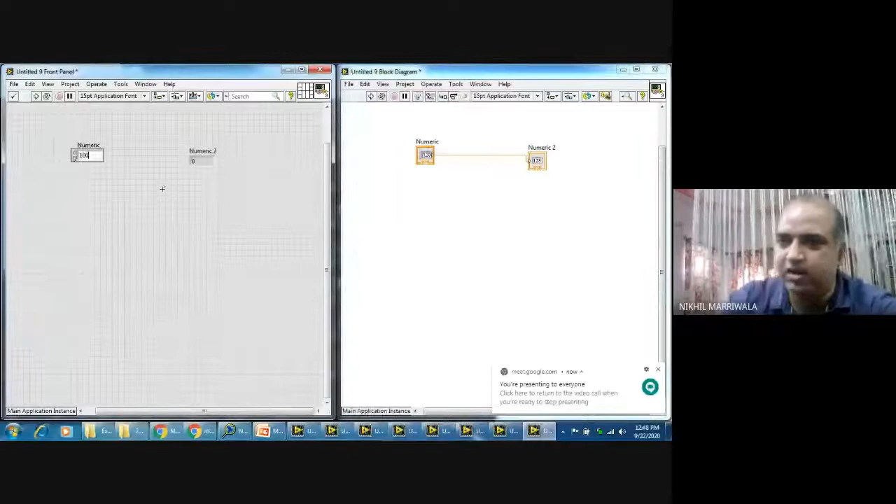So now I just connect the two together. I just connected the two together. So if you give any value here, the same has to be indicated. That's it, this is the simple thing.

What is the algorithm used? There is no algorithm used, sir, it has to be developed by you. I am just talking about how to utilize the features of this software. The problem needs to be identified by you people, and you need to develop your algorithm accordingly. Just the only thing you need to do is understand or draw a flow diagram, a block diagram for your problem, and utilize these blocks.

Ma'am, shortcuts - see, what I'll do is I'll send my presentation, and there are all the shortcuts available in this, right? So simple shortcuts, while you start working with this software, you'll definitely follow them, right? Otherwise, all the Windows shortcuts are also utilized in this, right? So I hope, yes, Tejaswini ji, thank you very much for asking these questions. The point is that all the shortcuts are similar to what you are using in Microsoft Windows, right?

Anything else? Right. So I hope I was able to give something good to you people, and you can even switch on your mics and talk to me directly.